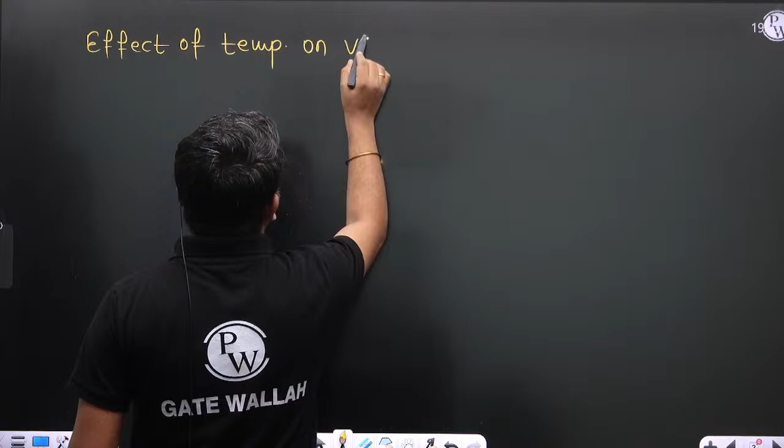So beta, whatever concept we discussed in the previous class, is that clear to everyone? In the last class, we discussed the effect of temperature on viscosity of fluid.

Okay, now see here, just one minute. So if I'm talking about liquids, as temperature increases, what happens to the liquid viscosity? As temperature increases, the liquid viscosity decreases.

Right? Good evening, Sahib. And why does it decrease? Because cohesive force decreases. As temperature increases, cohesive force decreases. We already discussed the factors responsible for the viscosity of the fluid.

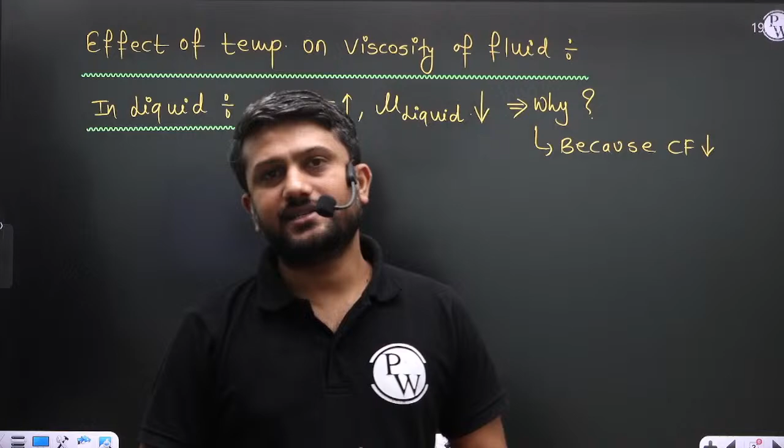The first factor is cohesive force, and the second factor is molecular momentum exchange. In liquids, cohesive force is predominant or significant as compared to molecular momentum exchange. And we know that as temperature increases, the intermolecular attraction force between molecules decreases, and that's why the viscosity of the liquid decreases as temperature increases.

Now if I'm talking about gases, what happens in case of gases? In gases, as temperature increases, the viscosity of gases increases. And why does it increase? Because molecular momentum exchange increases. In gases, molecular momentum exchange is significant over the cohesive force.

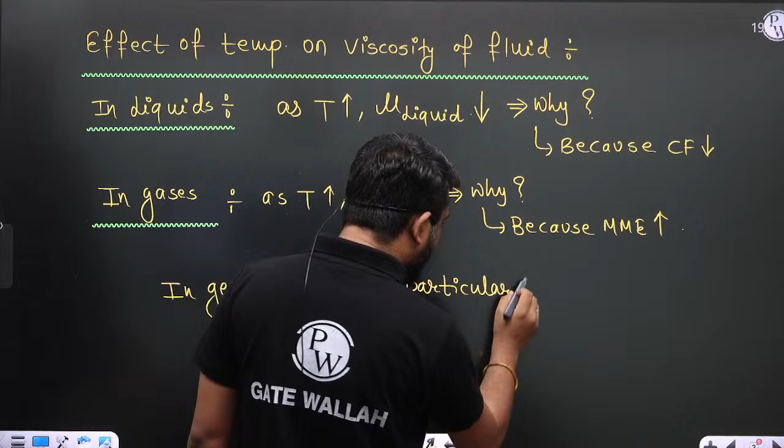Okay, and in general, at a particular temperature, which has more viscosity - liquid or gases? Tell me, at a particular temperature, which has more viscosity? Yes, absolutely. Liquid has more viscosity at a particular temperature as compared to gases.

Liquid has more viscosity as compared to gases at a particular temperature in general. Now see this graph. Just one minute, focus on this graph, beta. This is the graph between absolute viscosity versus temperature.

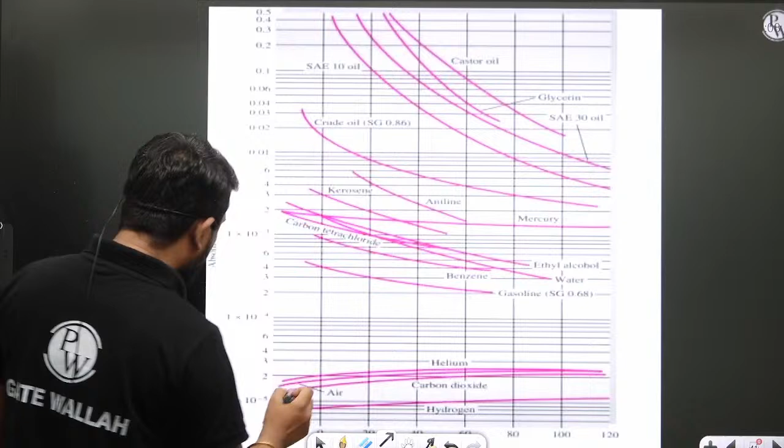In the y-axis there is viscosity, and in the x-axis there is temperature. Now see, if I'm talking about oils and liquids - castor oil, glycerine, SAE30 oil, crude oil, mercury, kerosene.

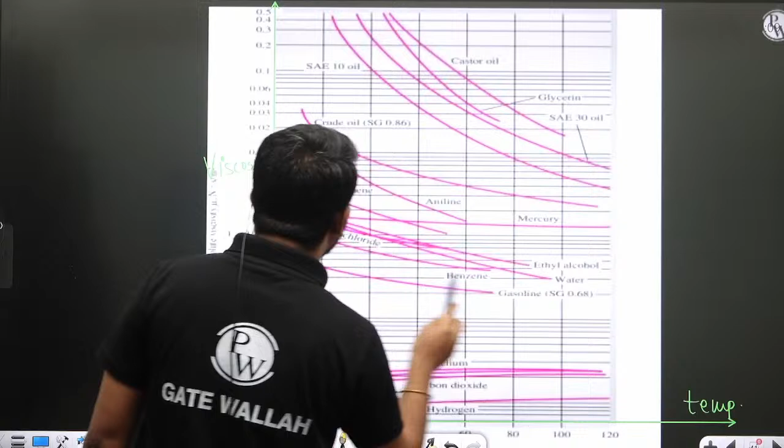So it's very much clear, as you increase the temperature, in case of liquid, viscosity decreases. From this graph we can easily comment that as temperature increases, liquid viscosity decreases. Now if I'm talking about gases, as the temperature increases, see here - in case of gases, these are the graphs. As temperature increases, the gas viscosity increases.

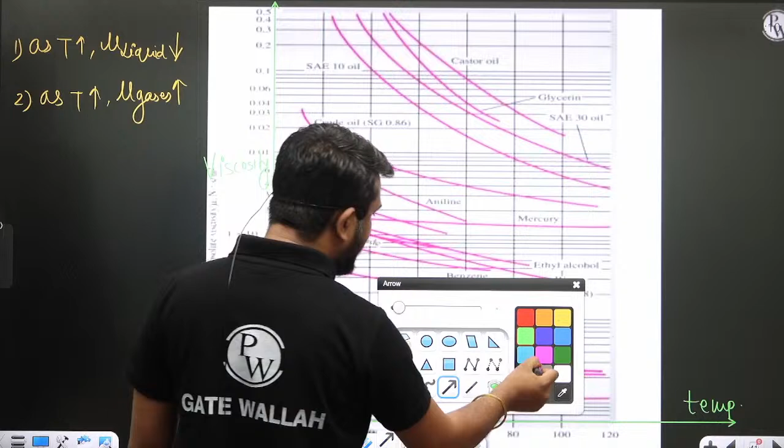And it's also very much clear at a particular temperature - let us consider this particular temperature, let's say 80 degrees Celsius. So beta, at a particular temperature, does liquid have more viscosity or do gases have more viscosity?

So let us assume in this graph that is 80 degrees Celsius. At a particular temperature, which has more viscosity - liquid or gases? Yes, absolutely correct, liquid has more viscosity at a particular temperature as compared to gases. I hope you can understand this conclusion.

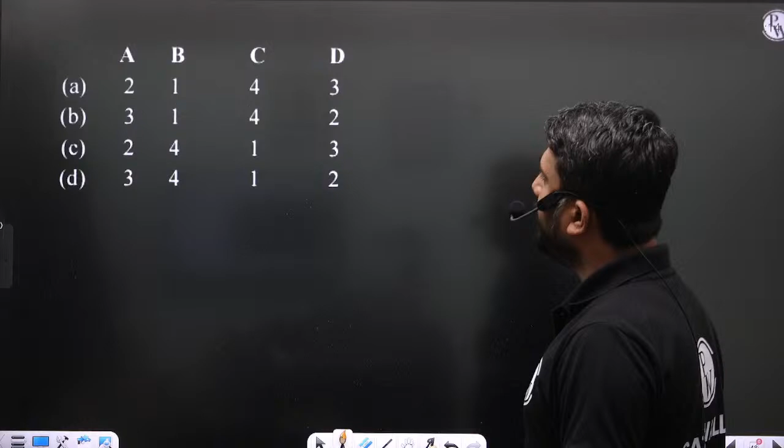So what is the correct match? A3, B1, C4, D2 - falling sphere is D2. So this is the correct matching: A3, B1, C4, D2. So A is wrong, C is wrong, D is wrong by themselves, but together A3, B1, C4, D2 is correct. So the correct answer is option B.

Fine. Now tell me, what is the effect of pressure on viscosity? The effect of pressure on viscosity of fluid is negligible. I hope you can understand this.

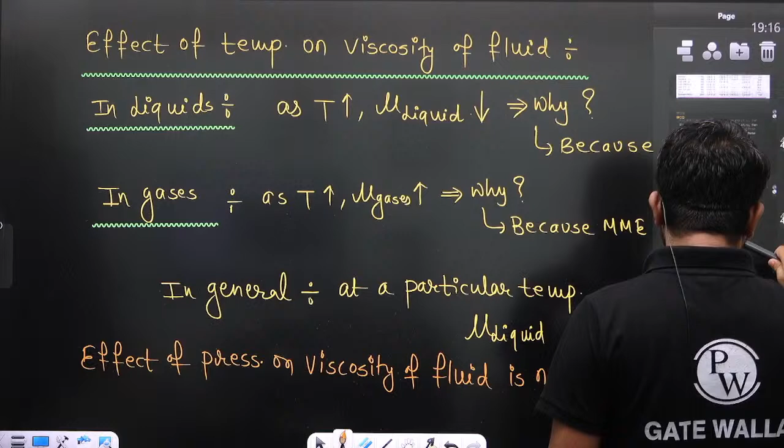Now come to the next fluid property, which is kinematic viscosity, also called momentum diffusivity. Can anyone tell me what kinematic viscosity is and why it is called momentum diffusivity? Kinematic viscosity is denoted by the Greek letter nu.

And what is kinematic viscosity? It is the ratio of dynamic viscosity to mass density, or simply density. So nu, which is the kinematic viscosity, is denoted by mu by rho - that mu by rho is nothing but the kinematic viscosity.

Now see here, we already have dynamic viscosity as a fluid property, so why is kinematic viscosity important? Why does kinematic viscosity come into the picture? Can anyone tell me why there is a need for kinematic viscosity?

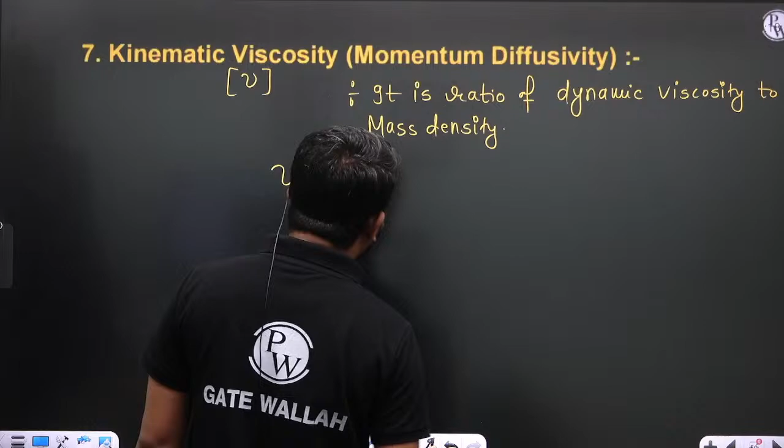How can we say two opposite properties, sir? See here, if I'm talking about dynamic viscosity, kinematic viscosity is dynamic viscosity by density. So what does dynamic viscosity represent? It represents the resistance in a flow.

This property represents resistance to flow. If dynamic viscosity is more, then definitely the resistance to flow is more. The second property, which is density, is nothing but the measure of inertia or measure of heaviness. Actually, beta, this helps to flow.

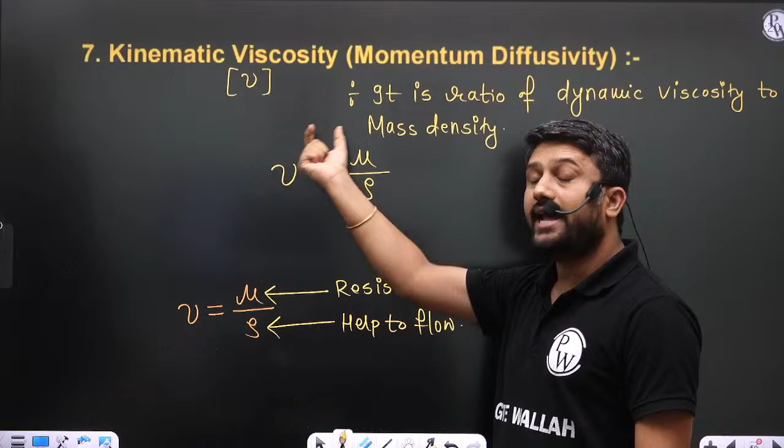Actually, this helps to flow. The numerator property of the fluid offers resistance to flow, whereas the density offers help to flow. So actually this kinematic viscosity is a ratio of two opposite properties. One property resists flow, and the other property helps flow. That's why this property comes into picture.

Because there is some property which is a ratio of two opposite nature properties, let us consider one layer. This is layer one of a fluid, and this is another layer. Let us consider the fluid particle present in this layer is flowing with a velocity of 10 meter per second.

This is layer number 1, and this is layer number 2. So layer number 1 particle is having velocity 10 meter per second. So momentum is transferred from layer 1 to layer 2.

Momentum transfer from layer 1 to layer 2 depends on mu and rho. I hope you can understand this. What will be the velocity of layer 2, or the particle present at layer 2? That depends on how much momentum is transferred by layer 1 to layer 2.

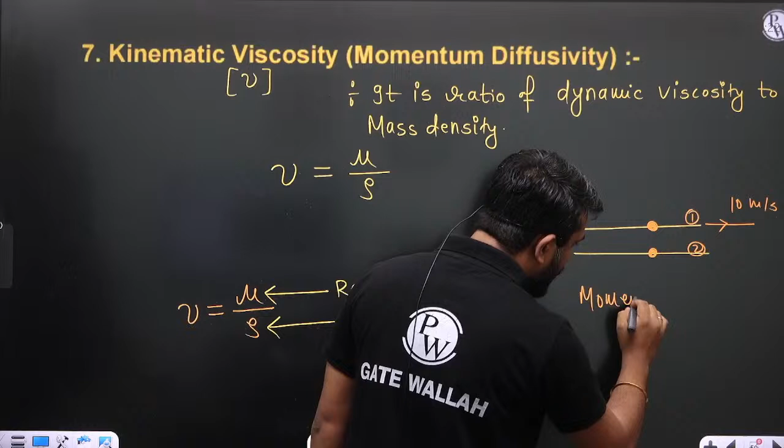This momentum transfer from layer 1 to layer 2 is directly proportional to bonding between the molecules, or we can say it is directly proportional to cohesive force. So we can say it is directly proportional to viscosity.

Whereas this momentum transfer from layer 1 to layer 2 is directly proportional to 1 upon density, or inversely proportional to density. If inertia is more, then momentum transfer will be less.

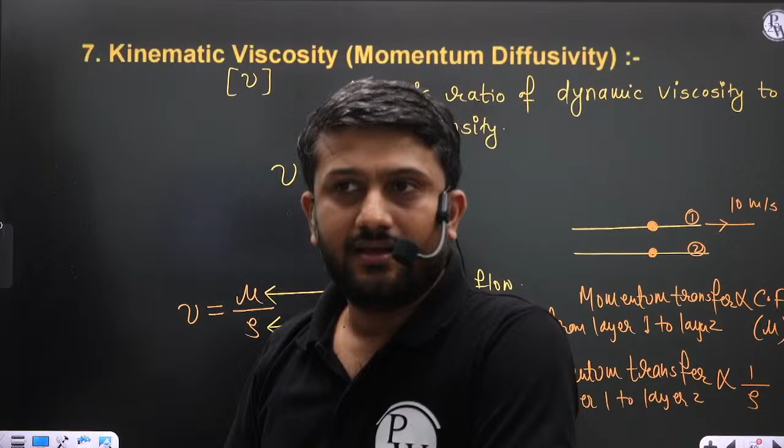Is it clear? So beta, can we say this momentum transfer, if you compile these two factors, then we can say that momentum transfer from layer 1 to layer 2 is directly proportional to mu by rho.

Is it fine? So we can define, this is the fluid property. The dynamic viscosity is a fluid property, this density is a fluid property, that means the ratio is also a fluid property.

And this ratio is called momentum diffusivity, because momentum transfer from layer 1 to layer 2 depends on these two. So that is called momentum diffusivity, and also we can say this is the kinematic viscosity. So beta, it is clear why kinematic viscosity comes into picture.

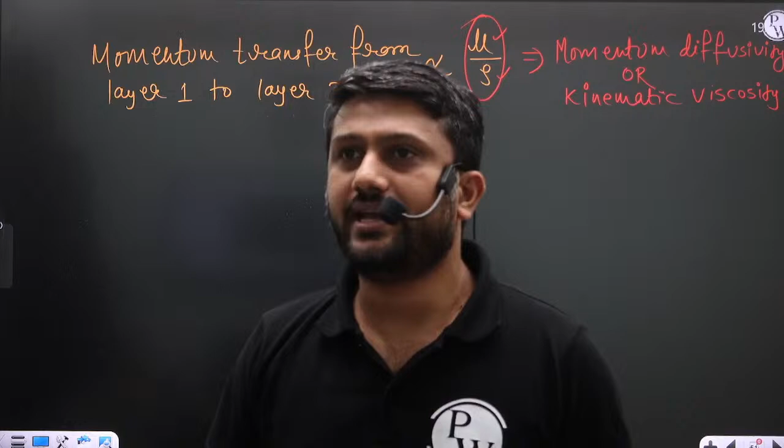Though we have the dynamic viscosity, why does kinematic viscosity come into picture? Actually, kinematic viscosity is a ratio of two properties which tells us about the momentum transfer, or momentum diffusion, from one layer to another. That's why dynamic viscosity alone is not sufficient to tell us how much momentum transfers from one layer to another. The dynamic viscosity does not tell us that. Are you getting my point?

Momentum transfer from layer 1 to layer 2 depends on the dynamic viscosity. It also depends on the density: directly proportional to the viscosity, inversely proportional to the density. That's why another property is required which tells us how much momentum transfers from layer 1 to layer 2, and that's why kinematic viscosity comes into picture.

Is it clear or not? Is it crystal clear? These things you won't find in any book, whatever I explained. But please try to understand these things. Is it clear? I want a reply from everyone, those students present here. Is it clear or not?

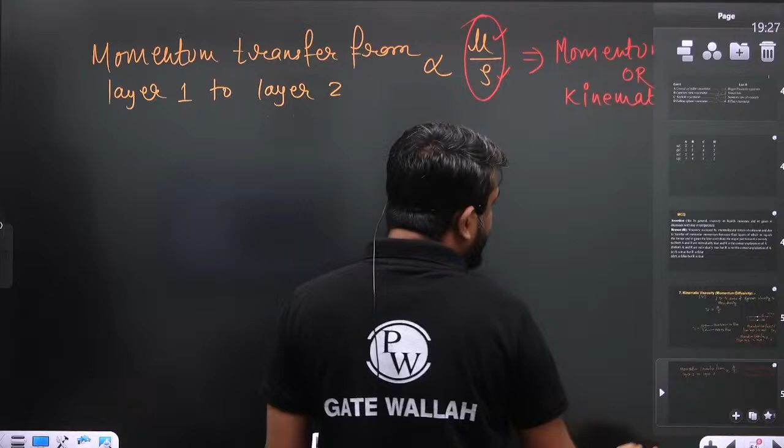Okay fine, now come to the unit part. What is a unit? Let's talk about the SI unit. Can anyone tell me what is the SI unit of kinematic viscosity?

What is the SI unit of the kinematic viscosity? Can anyone tell me? Okay, it's simple. See, kinematic viscosity is mu by rho. And what is the unit of mu?

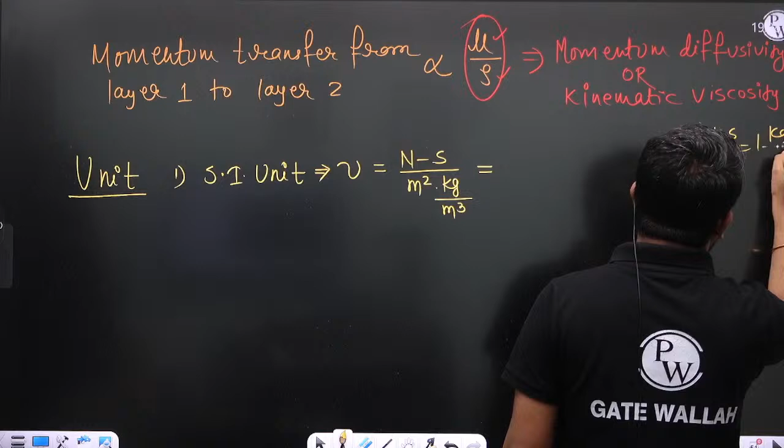The unit of mu is Newton second per meter square, and the unit of rho is kg per meter cube. Also we know that 1 Newton second per meter square is equal to 1 kg per meter second. So instead of Newton second per meter square, we can write kg per meter second into meter cube per kg. So kg cancels out, leaving meter into meter square.

So ultimately what you get is meter square per second. This is the SI unit of kinematic viscosity. Now, in the MKS system, the unit is the same, meter square per second. In the CGS system, the unit is centimeter square per second.

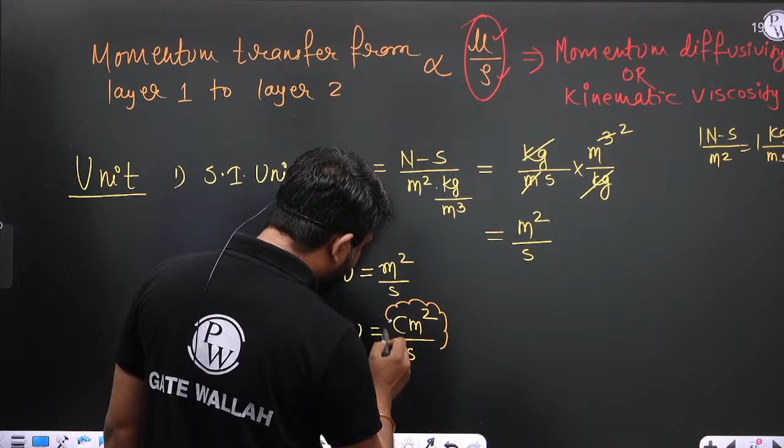And this centimeter square per second is called Stoke. So 1 Stoke is equal to 1 centimeter square per second.

Now, can you establish the relation between the SI unit and the CGS unit? So 1 Stoke is equal to 1 centimeter square per second, or we can say 10 to the power minus 4 meter square per second. So always remember, 1 Stoke is equal to 10 to the power minus 4 meter square per second. This is the relation between the CGS unit and the SI unit.

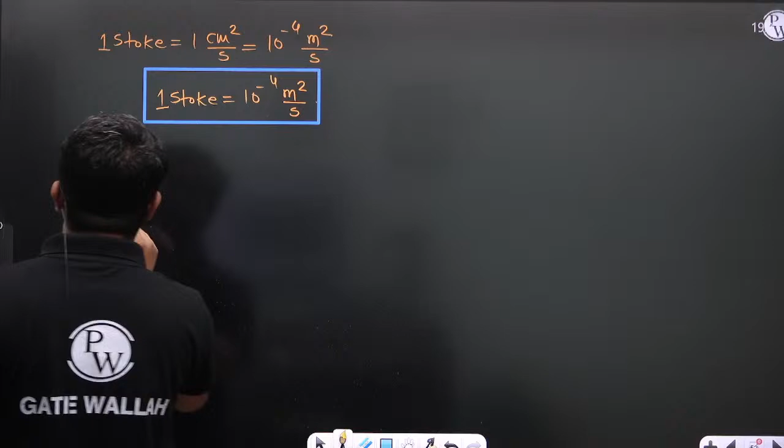Is it okay? Now see the effect of temperature on kinematic viscosity of fluid. Effect of temperature on kinematic viscosity of fluid. So what happens in case of gas, and what happens in case of liquids?

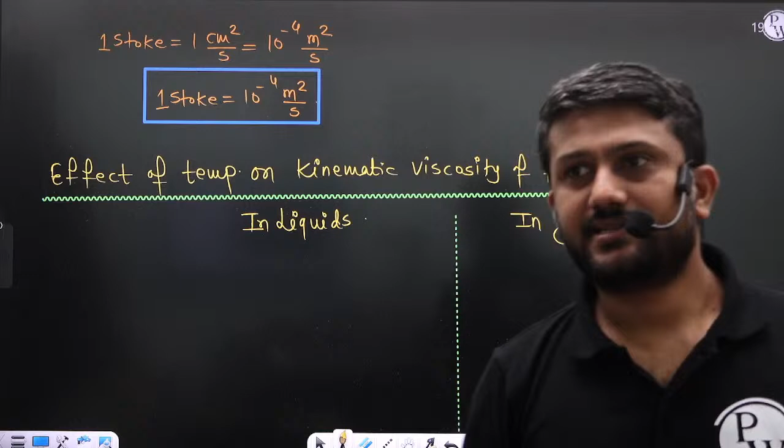In liquids, what happens as you increase the temperature? And in case of gas, what happens? When you increase the temperature, what happens in case of liquids, and what happens in case of gases? So, what happens in case of liquid? Can anyone tell me the answer, or think about it?

Okay, if I'm talking about liquids, we know kinematic viscosity is the ratio of dynamic viscosity to density. Now, as you increase the temperature...

As the temperature increases, what happens with dynamic viscosity and density? I'm talking about liquids now. We know that as the temperature increases, the dynamic viscosity of liquid decreases.

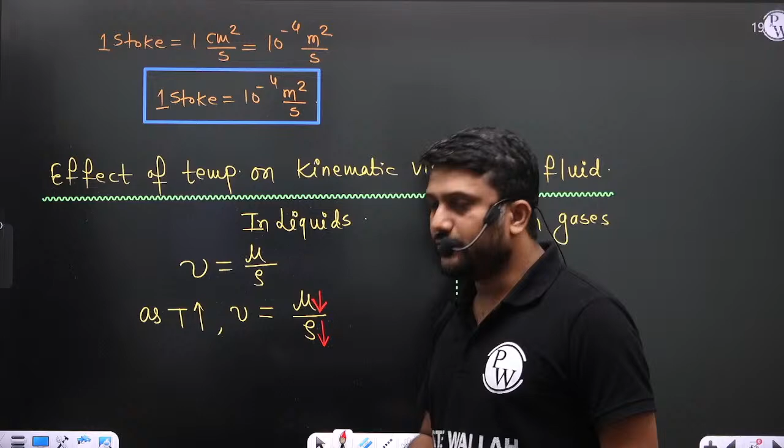Also, as the temperature increases, the density decreases. Please try to understand this: as the temperature increases, dynamic viscosity of liquid decreases, and density of liquid decreases. So if you see this expression, the numerator, dynamic viscosity, decreases, and the denominator also decreases.

But if you see this relation clearly, dynamic viscosity decreases more as compared to the decrease in density. If you increase the temperature, dynamic viscosity decreases more as compared to density. Sir, how can you say this? As temperature increases, dynamic viscosity decreases more as compared to decrease in density.

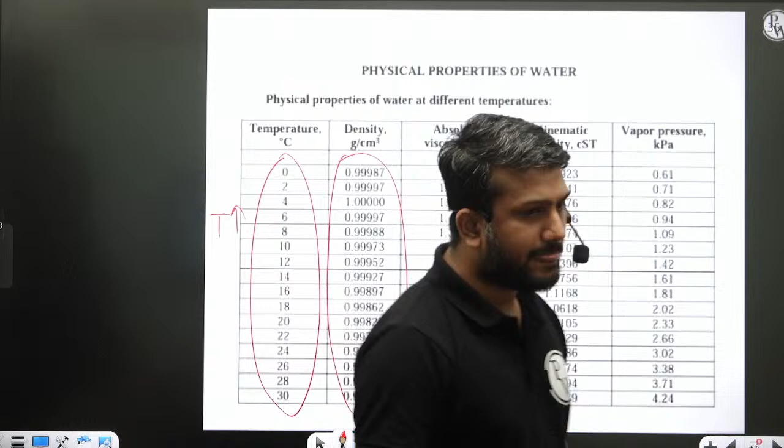So I will give you an example. Let us consider water. As the temperature increases, see here, definitely after 4 degrees Celsius, the density continuously decreases. So as the temperature increases, density decreases.

Now come to the viscosity part. Viscosity also decreases, but if you see this data, it is very much clear that viscosity decreases more. For a given amount of temperature change, it is clear that viscosity decreases more as compared to decrease in density.

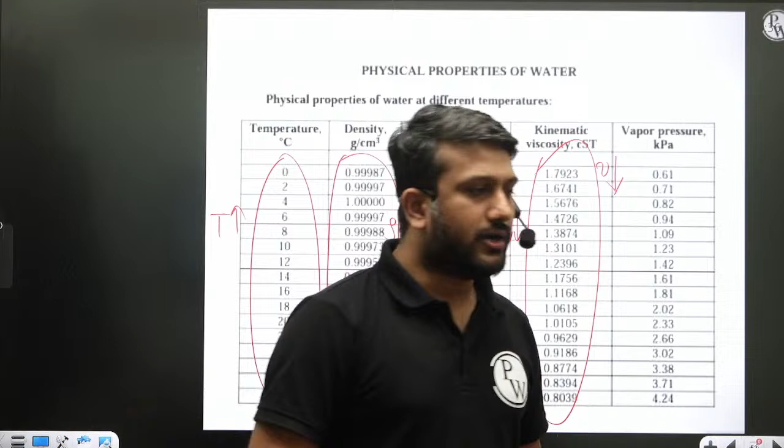Is it fine now? And if you see this kinematic viscosity table, it is very much clear that kinematic viscosity decreases. So as the temperature increases, kinematic viscosity decreases in case of liquid. In case of liquid, as the temperature increases, the numerator value decreases more as compared to the denominator value, and that is the reason liquid kinematic viscosity decreases.

Is it clear to everyone? Now come to the gases. What happens in case of gases? In case of gases, as the temperature increases, what happens with the dynamic viscosity of gases?

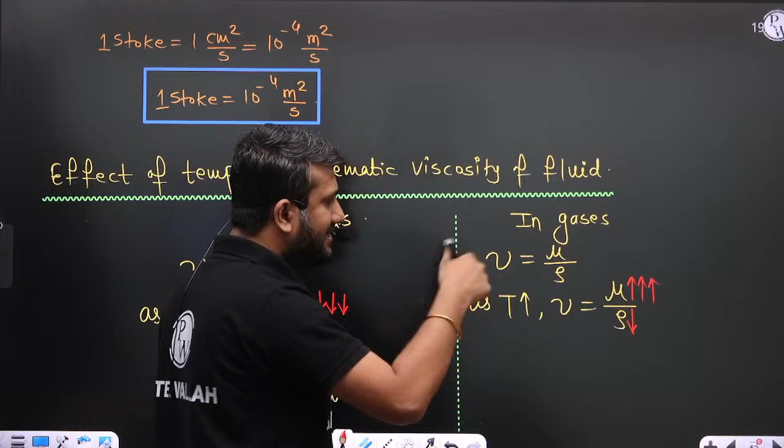As the temperature increases, the dynamic viscosity of gases increases. And what about the density? As the temperature increases, the density decreases. So it is very much clear, numerator increases, denominator decreases, so ultimately nu increases. So as the temperature increases, kinematic viscosity of gases increases.

As the temperature increases, liquid kinematic viscosity decreases. Is it clear or not? Tell me, is it clear to everyone?

No, why does gas also decrease? Sir, in gas it increases, because numerator increases and denominator decreases. So nu is directly proportional to mu, so mu increases, nu increases. Nu is inversely proportional to rho, so rho decreases, nu increases. So anyway, nu increases. So in case of gases, as temperature increases, the kinematic viscosity increases.

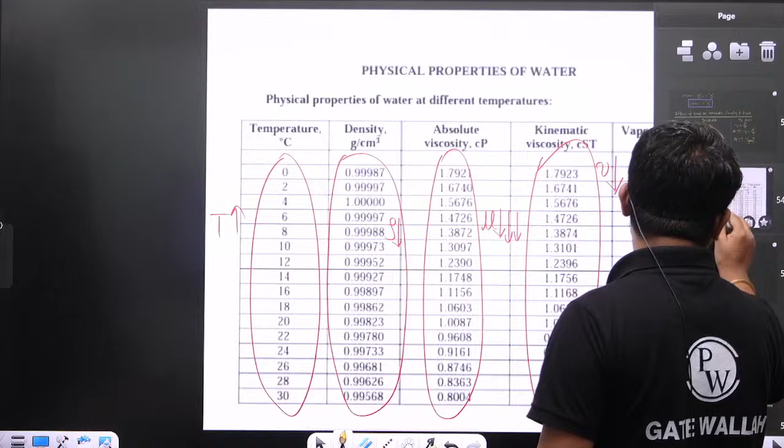Okay, now can anyone tell me, if you compare kinematic viscosity of liquid and kinematic viscosity of gases, which one is more? Is kinematic viscosity of liquid more compared to gases, or is kinematic viscosity of gases more compared to liquid, or are both possible? And whatever I am asking corresponds to a particular temperature.

What is your answer? At a particular temperature, tell me which one is correct. Option A, this is option B: the liquid kinematic viscosity is lesser than the gas kinematic viscosity. Option C, both are possible. Option D, none of these.

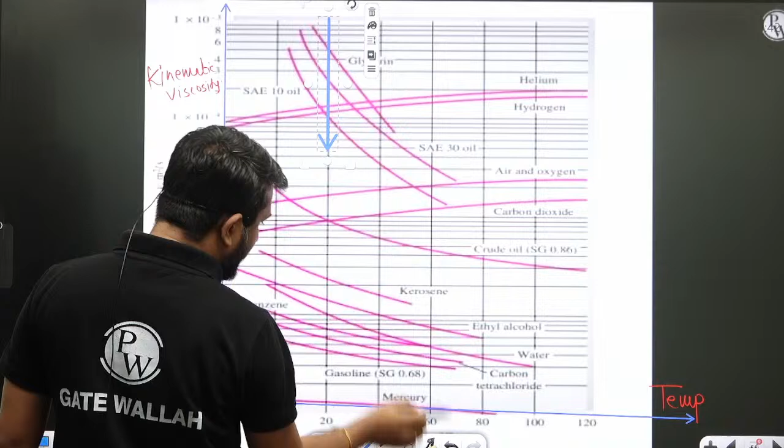Now, if I'm talking about a particular temperature, let us consider that is 20 degrees Celsius. Now, at 20 degrees Celsius, if you see here,

if I'm talking about air and oxygen, see here, this is the kinematic viscosity of air and oxygen, right?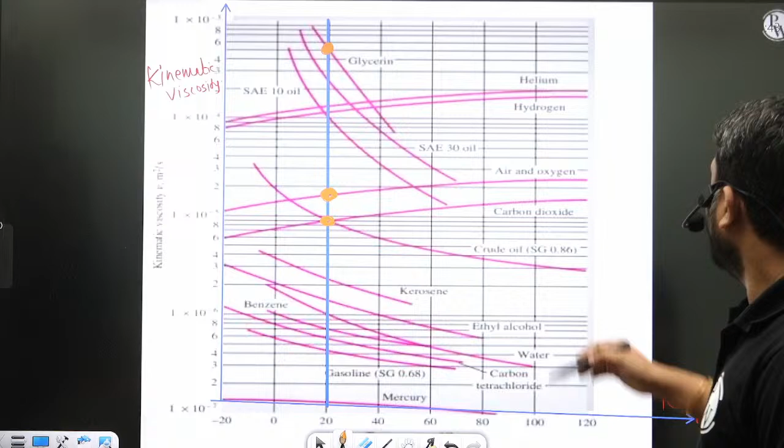Now, if I'm talking about crude oil, that is a liquid. So at 20 degrees Celsius, this is the kinematic viscosity of crude oil. At 20 degrees Celsius, kinematic viscosity of glycerin - glycerin is liquid, air and oxygen are obviously gaseous, and crude oil is again liquid.

So tell me, at a particular temperature, is liquid kinematic viscosity greater than the gas kinematic viscosity, or is liquid kinematic viscosity lesser than the gas kinematic viscosity? At a particular temperature, both are possible.

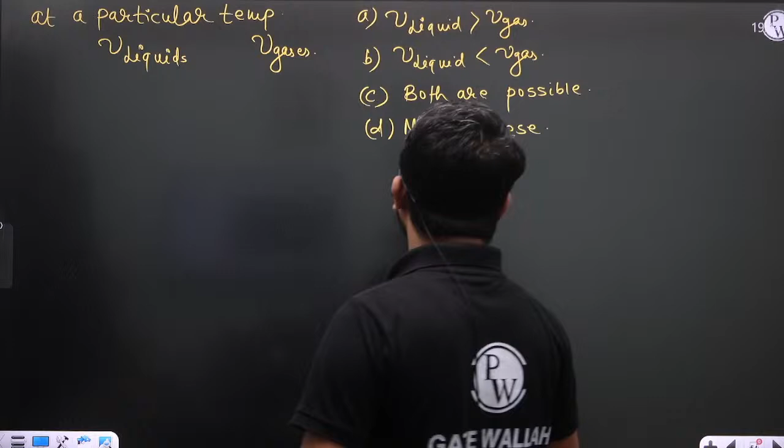We didn't specify which liquid, which gas. I'm simply asking, at a particular temperature, what is the relation between kinematic viscosity of liquid and kinematic viscosity of gases? Since I'm not specifying the liquid and gas, at a particular temperature both are possible - kinematic viscosity of liquid could be greater than that of gas, or it could be lesser.

Now, at a particular temperature, let's look at the kinematic viscosity of water and kinematic viscosity of air. What is the relation between kinematic viscosity of water and kinematic viscosity of air? Now see again this graph - kinematic viscosity variation with temperature.

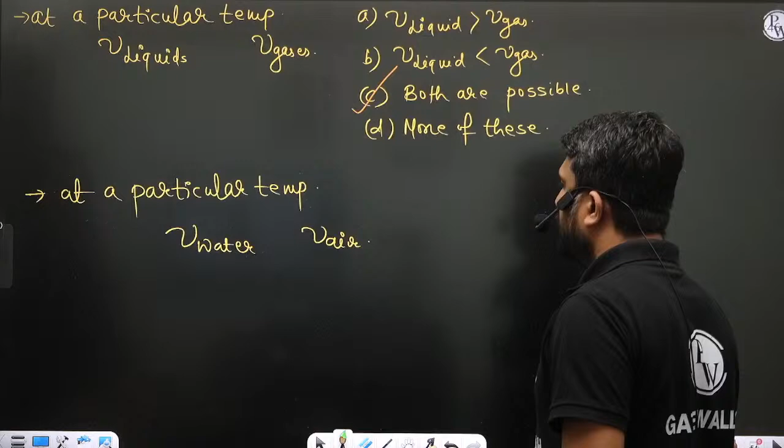This is the graph for water, and this is the graph for air. So at any temperature, not only at a particular temperature, but at any temperature, we can say that water's kinematic viscosity is lower than air's kinematic viscosity.

So whether you are comparing at a particular temperature or at any temperature, the kinematic viscosity graph of water is below the kinematic viscosity graph of air. So at any temperature, the kinematic viscosity of water is lower than the kinematic viscosity of air.

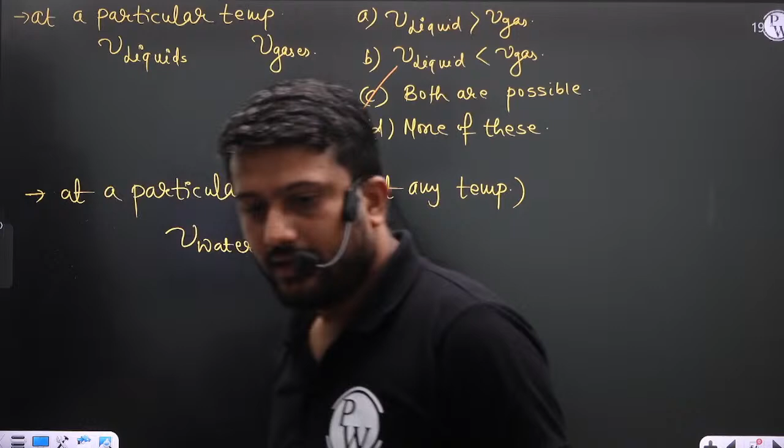Is it fine? So if someone asks you what is the relation between kinematic viscosity of liquid and kinematic viscosity of gas at a particular temperature, you can say kinematic viscosity of liquid could be more or less than kinematic viscosity of gas - both are possible. But if someone asks about kinematic viscosity of water versus air specifically, you can say kinematic viscosity of water is lower than kinematic viscosity of air. Is it fine? Shall we proceed?

Okay, now come to the very important relation between kinematic viscosity and temperature for ideal gases - for gases that are assumed as ideal gases.

See here, relation between kinematic viscosity and temperature. Relation between kinematic viscosity and temperature for the gases, and gases are assumed as ideal gases.

Now see here, nu is equal to mu by rho. So if I'm talking about the dependency of mu with temperature, what is the dependency of mu with temperature in case of ideal gases? What is the relation between mu and temperature if I'm talking about ideal gases? What is that relation?

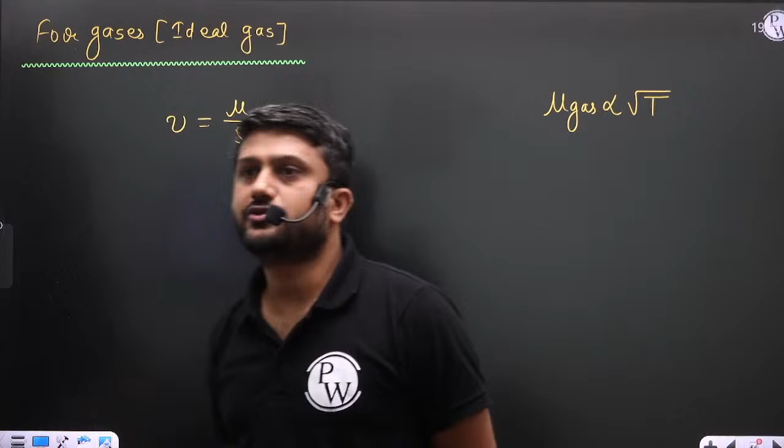Beta, we already discussed this, na? We already discussed in case of gases, the dynamic viscosity is directly proportional to root over T. We discussed this part in the previous class. Remember the Sutherland equation? Remember the Sutherland law? Remember the kinetic theory of gases? So we can say that dynamic viscosity of gases is directly proportional to root over T.

What about the density? What about the density? So if you use the ideal gas equation, we know that PV is equal to MRT, or simply P is equal to M by V RT. And what is M by V? That is rho. So simply we can say rho is equal to P upon RT.

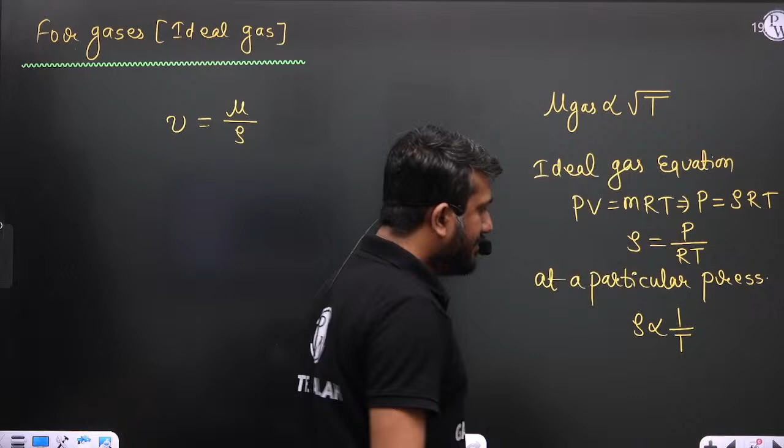Now, at a particular temperature and pressure, R is a characteristic gas constant. So at a particular pressure, we can write density is directly proportional to 1 by temperature. Density is directly proportional to 1 by temperature, at a particular pressure.

Now see here, we know the relation of mu and T, and we know the relation between rho and T. So from here, we can say kinematic viscosity of gases is directly proportional to root over T upon 1 by T. And from here we can say the kinematic viscosity of gases is directly proportional to T to the power 1 by 2 plus 1, that means T to the power 3 by 2.

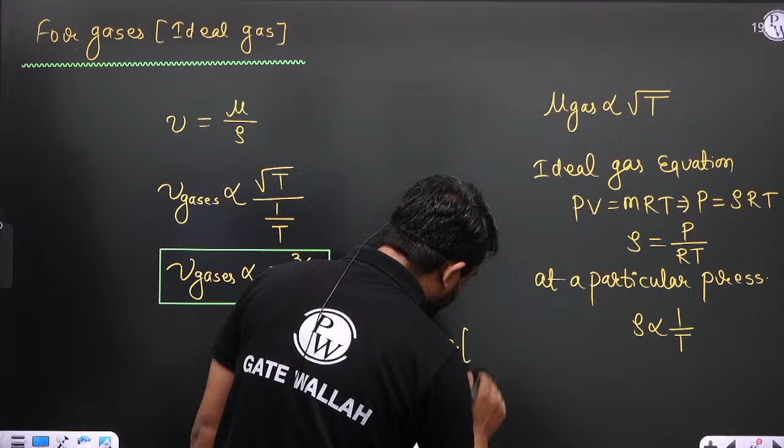So this is a very important relation. The kinematic viscosity of ideal gases is directly proportional to T to the power 3 by 2, where T is the absolute temperature, in Kelvin scale. T is nothing but the absolute temperature.

So if we know the kinematic viscosity of gas corresponding to a particular temperature T1, then we can easily comment on the kinematic viscosity of gas at a corresponding temperature T2. Because we can write nu1 by nu2 is equal to T1 by T2 to the power 3 by 2.

Okay, is it clear or not? Tell me. So if it is clear, then can we solve this MCQ problem?

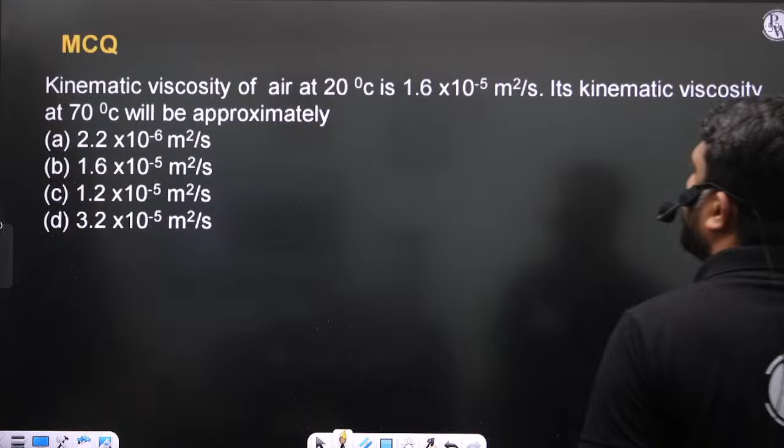In the question, it is mentioned that the kinematic viscosity of air at 20 degrees Celsius is 1.6 into 10 to the power minus 5 meter square per second. Its kinematic viscosity at 70 degrees Celsius will be approximately. So temperature increases: in case 1, the temperature is 20 degrees Celsius; in case 2, temperature increases to 70 degrees Celsius. So 20 degrees Celsius means 293 Kelvin, and 70 degrees Celsius means 343 Kelvin.

So temperature increases, and we know that as temperature increases, the kinematic viscosity of gases increases. Now see, if you check the options, option B says it remains the same, 1.6 into 10 to the power minus 5. Option B says if you increase the temperature, kinematic viscosity remains the same. So this is wrong.

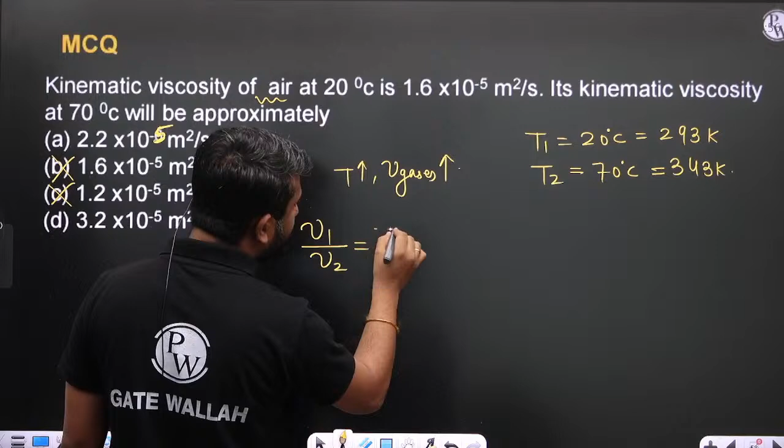So we know that relation. We can write directly nu1 by nu2 is equal to T1 by T2 to the power 3 by 2. So nu1 is 1.6 into 10 to the power minus 5 upon nu2, where T1 is the absolute temperature.

T1 is 20 degrees Celsius. Convert it into Kelvin scale, so 293. So 293 divided by 343, this is 343 to the power 3 by 2. So calculate.

Calculate kinematic viscosity corresponding to 70 degrees Celsius. So what is the correct answer? Right, 2.2 into 10 to the power minus 5 meter square per second. So this is the answer.

Okay, now come to the next question. The next question is an MSQ question.

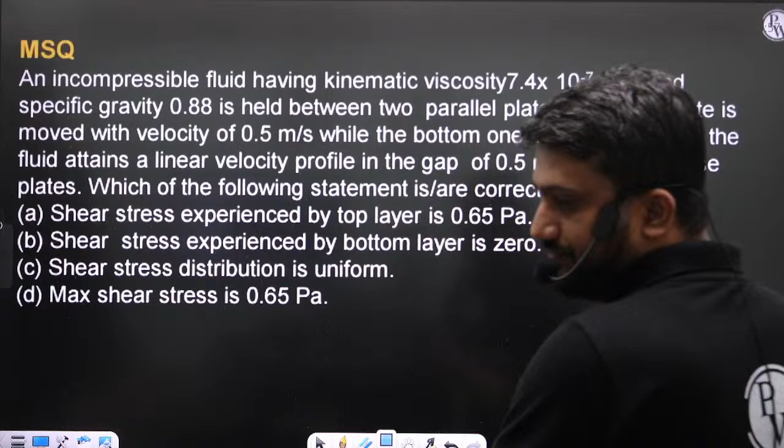No, Saturday you have class.

Now see the next question. An incompressible fluid having kinematic viscosity 7.4 into 10 to the power minus 7 meter square per second and specific gravity 0.88 is held between two parallel plates. If the top plate is moved with a velocity of 0.5 meter per second, while the bottom one is held stationary, the fluid attains a linear velocity profile in the gap of 0.5 millimeter between these plates. Which of the following statement is correct?

Option A says shear stress experienced by the top layer is 0.65 Pascal. Option B says shear stress experienced by the bottom layer is 0. Option C says shear stress distribution is uniform. And option D says maximum shear stress is 0.65 Pascal.

So basically in this question there are two plates, plate number 1 and plate number 2. The bottom plate is fixed, and the top plate is moving with some velocity, which is mentioned in the problem, equal to 0.5 meter per second.

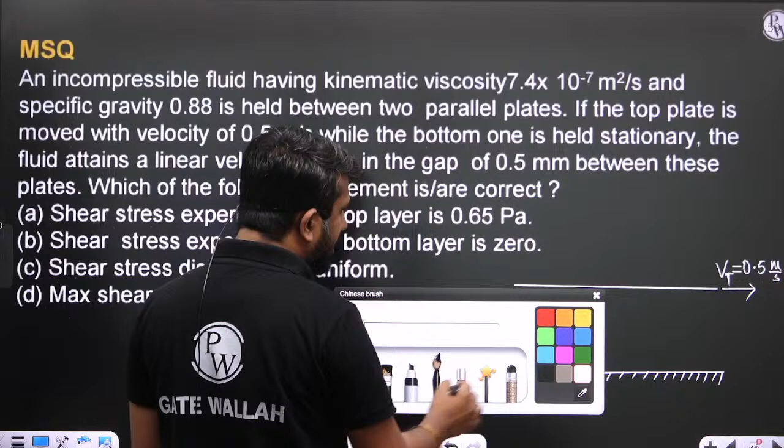In between these two plates, there is a fluid having a specific gravity of 0.88. Also, the gap between these two plates is mentioned, and that gap is 0.5 mm.

Also, the velocity profile for the fluid is mentioned, and that is a linear velocity profile. So this is the velocity profile.

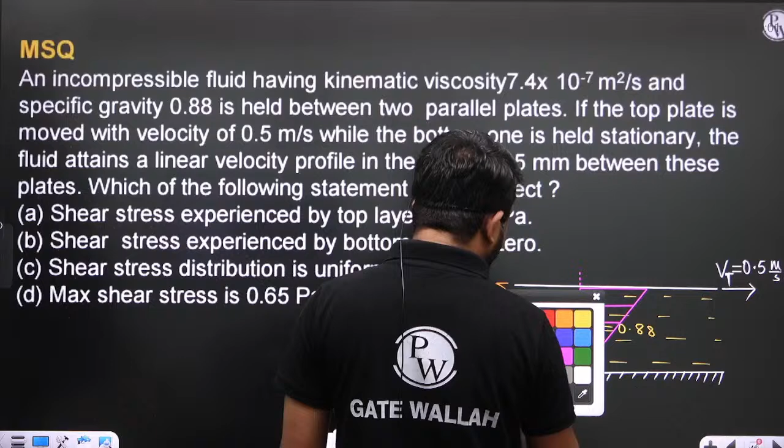Also in this problem, kinematic viscosity is mentioned, nu, and that is 7.4 into 10 to the power minus 7 meter square per second.

Now see, in this question, shear stress is asked. So to find out the shear stress, we have Newton's law of viscosity. To calculate the shear stress in a layer, we use that Newton's law of viscosity.

From Newton's law of viscosity we can write: shear stress experienced by any layer is equal to mu du by dy at that layer. This is your x-axis and this is your y-axis. So shear stress experienced by any fluid layer is equal to mu du by dy.

So first calculate mu, because kinematic viscosity is mentioned now. We know that nu is equal to mu by rho, or simply we can say mu is equal to nu into rho.

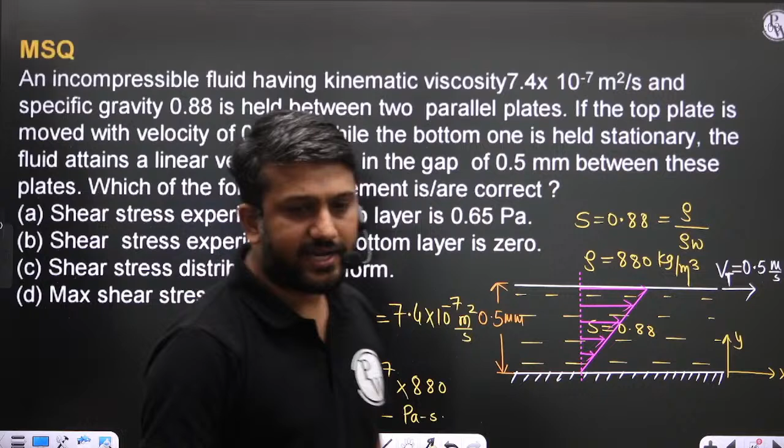So we can write mu, which is the dynamic viscosity, equal to 7.4 into 10 to the power minus 7 multiplied by 880, and this comes in Pascal second. So can anyone tell me what is the dynamic viscosity? 7.4 into 880 equals 6512, so that is 6512 into 10 to the power minus 7 Pascal second. This is the dynamic viscosity.

Now see here, beta. In this problem it is clearly mentioned that the velocity profile is linear. If this is the bottom plate and this is the top plate moving with a velocity of Vt, it is clearly mentioned that the velocity profile is linear. This is the velocity profile.

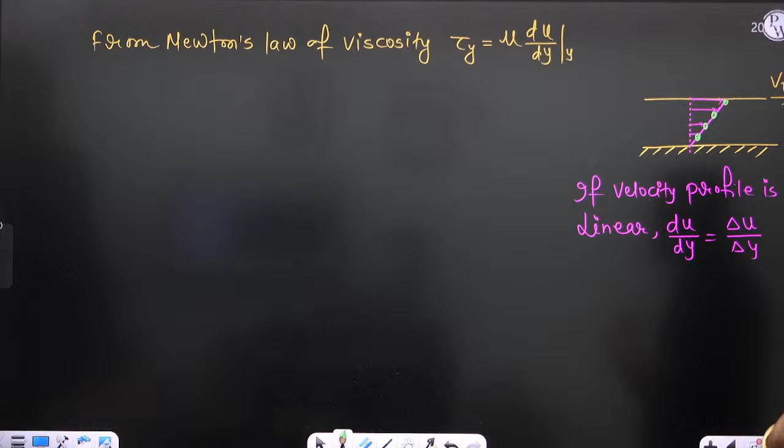So if velocity profile is linear, then simply we can write du by dy is equal to delta u by delta y. If you calculate the slope here, the slope is same. So if velocity profile is linear, then directly we can write du by dy is equal to delta u by delta y. Or we can say this is also equal to the top plate velocity minus bottom plate velocity divided by the gap between these two plates. This we can write in case of the linear velocity profile only.

Is it clear now? So directly we can write that tau at any y is equal to mu into, since velocity profile is linear, u top minus u bottom divided by the gap between these two plates. Now see here, the shear stress experienced by any layer, because in this case du by dy is constant.

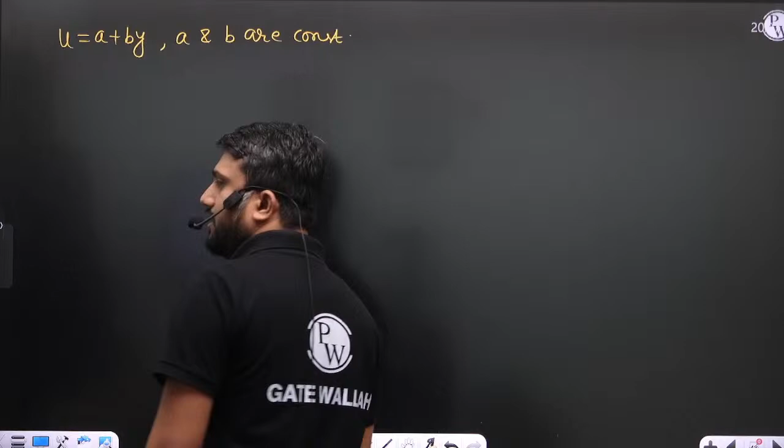If in this question it is clearly mentioned the velocity profile varies linearly, let us consider the velocity profile as u equals a plus by, where a and b are constant. This is the linear variation. So if you calculate du by dy, then it becomes b. That means du by dy is not a function of y in case of the linear velocity profile.

Now see here, if you see this Newton's law of viscosity, mu is not a function of y. Mu is constant, each layer having the same viscosity. So mu is independent of y, and du by dy is independent of y for the linear velocity profile. That means each layer experiences the same shear stress. Are you getting my point?

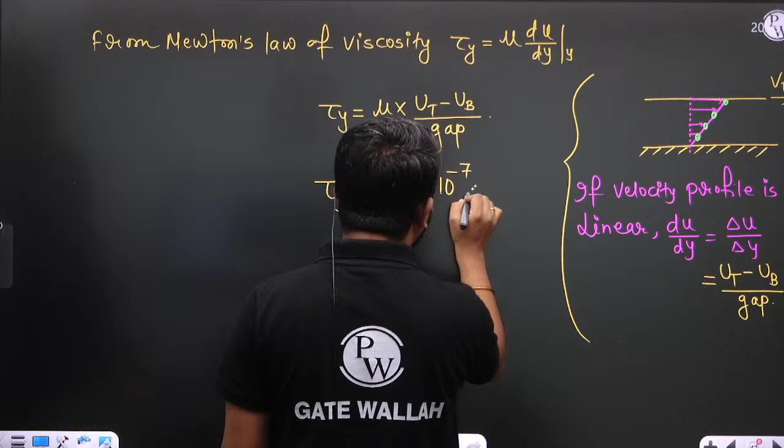And how do you calculate the shear stress? You can easily calculate it from here. In case of linear velocity profile, directly we can write this. Mu we already calculated as 6512 into 10 to the power minus 7, into the top plate velocity which is 0.5, minus the bottom plate velocity which is 0, divided by the gap which is 0.5 mm, that is 0.5 into 10 to the power minus 3 meter. So tau at any y comes to 0.6512 Pascal. This is the shear stress.

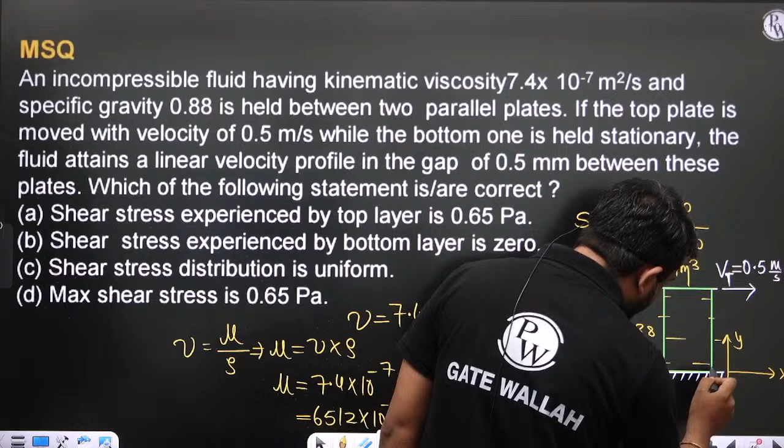So beta, each layer experiences the same shear stress. Is it clear to everyone? If you draw the shear stress variation, this is the shear stress variation, and this is the velocity variation. So each layer experiences the same shear stress, right?

Now come to statement C. Shear stress distribution is uniform. Is it correct or not? Shear stress distribution is uniform, correct or not? Yes, your shear stress distribution is uniform. So C is correct. Shear stress distribution is uniform, C is correct. Now come to statement D.

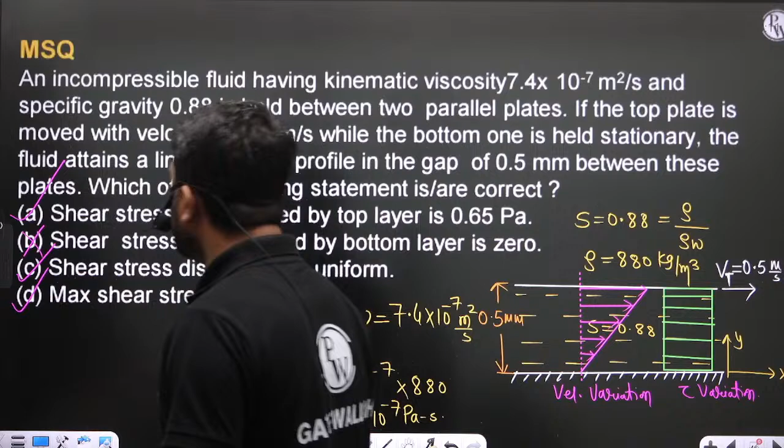Statement D says maximum shear stress is 0.65 Pascal. Yes, maximum shear stress is also 0.65 Pascal. So what is the correct answer for this question? The correct answer for this question is A. A is correct, C is correct, and D is correct.

Is it clear to everyone? Is this question clear or not? Beta, uniform na? Shear stress distribution is uniform na? Is this linear or uniform? Tell me, is this linear or uniform? Beta, uniform na?

Okay, so is it clear to everyone? Is it clear to everyone? So shall we move to the next part? Shall we move to the next part? Now come to the next part.

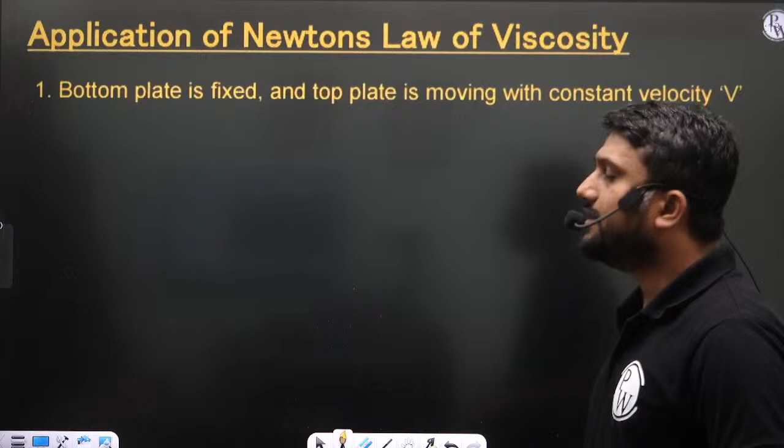So the next part is application of Newton's law of viscosity. We discussed Newton's law of viscosity in a very detailed manner. Now come to the application of Newton's law of viscosity. So the first application: bottom plate is fixed and the top plate is moving with constant velocity, that is V. We already discussed this case in the previous question only.

Right, the bottom plate is fixed. So let us consider, this is the top plate and this is the bottom plate. So in this case, we assume the bottom plate is fixed, whereas the top plate is moving with a certain constant velocity, that constant velocity is V. So let us consider that is Vt, Vt is equal to V. The top plate is moving with constant velocity, that is V.

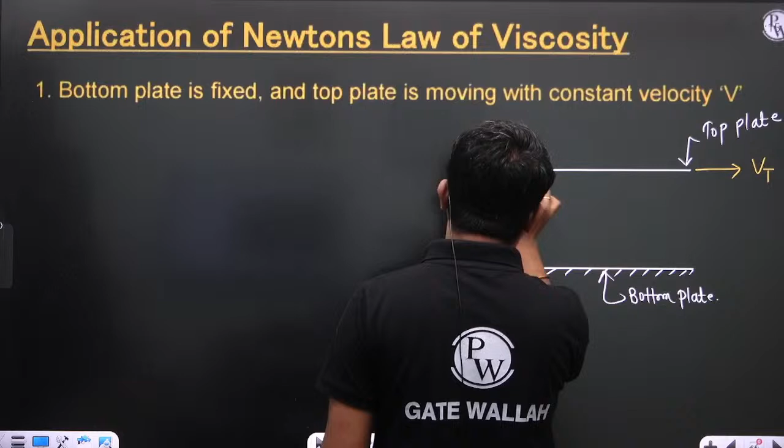And in between these two plates there is a fluid, right? And here what we assume in the fluid is that the velocity profile is linear. So beta, this is our assumption. Please try to understand this: velocity profile is linear. Maybe in future you will get cases where velocity profile is non-linear, but here what I'm assuming is velocity profile is linear.

So the fluid layer attains a linear velocity profile. This is the velocity profile. U is a function of y, and U linearly varies with y.

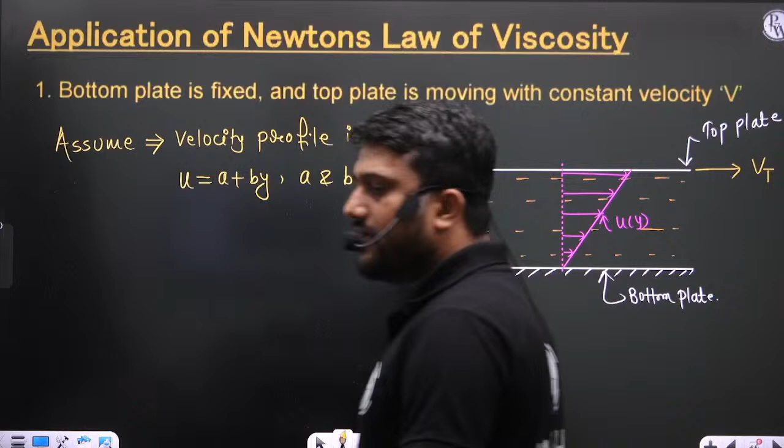To find the value of a and b, there is a need of boundary conditions, right? To calculate the value of a and b, there is a need of boundary condition. So let us just take 1 minute now.

Let us consider this gap is h. This is the x direction and this is the y direction. So to calculate a and b, there is a need of boundary condition. So can anyone tell me what is the boundary condition? What are the boundary conditions? Obviously, two boundary conditions are required.

Two boundary conditions are required. There are two constants, so two boundary conditions are required. So can anyone tell me what are the boundary conditions? So beta, it is simple now. Boundary conditions, if I'm talking about the boundary conditions,

at y is equal to 0, u is equal to 0, no slip condition. At y is equal to 0, u is equal to 0 because the bottom plate is stationary. And also we can write at y is equal to h, u is equal to Vt. Right? These are the no slip conditions. One no slip condition at y is equal to 0, another no slip condition at y is equal to h.

So we can write in this way. Now we have two boundary conditions. Now find out the value of a and b. So if we use the first boundary condition, at y is equal to 0, u is equal to 0. So from first boundary condition,

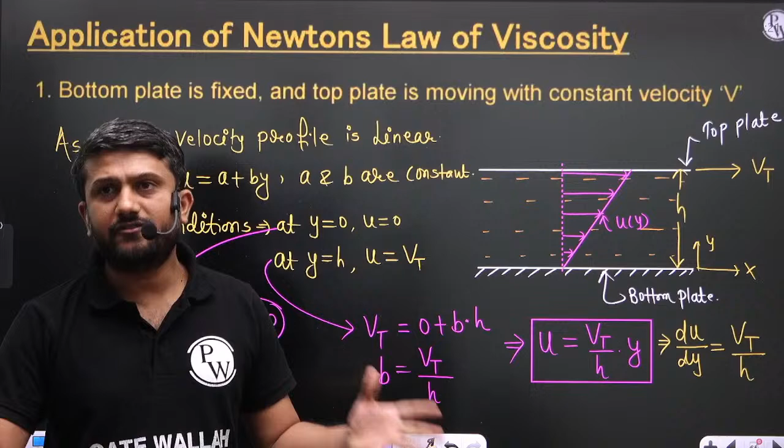That means beta, your du by dy is not a function of y, because the velocity profile is linear. So we can directly write du by dy is equal to, so tau at any y is equal to mu into Vt by h.

So this is the shear stress experienced by any layer, and it is also very much clear in this expression there is no y. That means shear stress is not a function of y. That means each layer experiences the same shear stress.

So if you draw the shear stress variation, this is the shear stress variation. The shear stress variation is uniform. This is the velocity variation, and this is the shear stress variation, the tau variation.

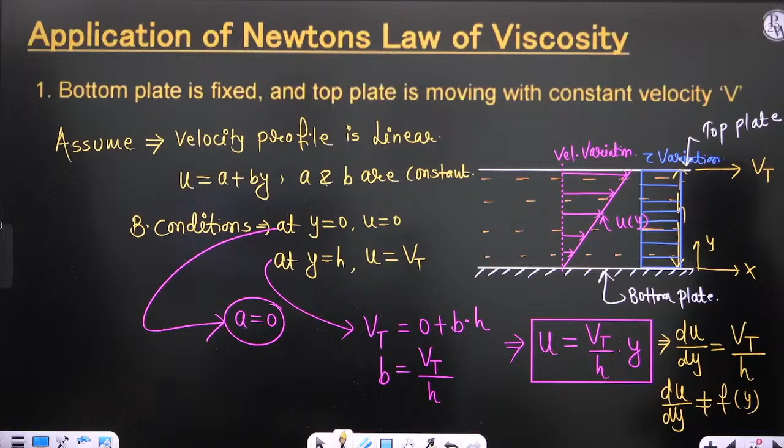Is it clear? If you want to generalize this expression for the linear velocity profile, in future you may get a problem in which the bottom plate is not fixed but is also moving with some velocity. So if you want to generalize this expression, we can write it in this way.

This is very simple. For linear velocity profile, there is no need to calculate the value of A, there is no need to calculate the value of B, if the velocity profile is linear.

If the velocity profile is non-linear, let us consider u is equal to a plus by plus cy square, a parabolic, second degree velocity profile. In that case, there is definitely a need to calculate a, b and c. But when the velocity profile is linear, there is no need to calculate a and b.

You can directly write, for linear velocity profile, du by dy is equal to delta u by delta y, or simply top velocity minus bottom velocity divided by gap. So the shear stress tau at any y is equal to mu into top velocity minus bottom velocity divided by gap. In general, we can write it this way.

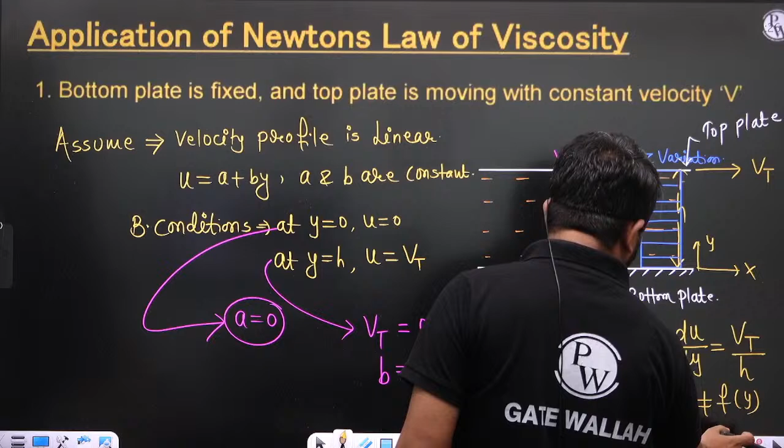At y equal to 0, if I ask you in general, even in interviews, what is the shear stress, most students say at y equal to 0 the shear stress is 0. But at y equal to 0, the shear stress is not 0. Even at y equal to 0, the shear stress is maximum at the surface. At the surface, the shear stress is maximum.

There is one reason for this confusion. At y equal to 0, u is equal to 0, because the bottom plate is stationary. So at y equal to 0, u is equal to 0, and so we think that du by dy is equal to 0.

But actually this du by dy, this du in this expression, please try to understand this point. This du is the relative velocity, but it is not the relative velocity between the plate and the fluid layer.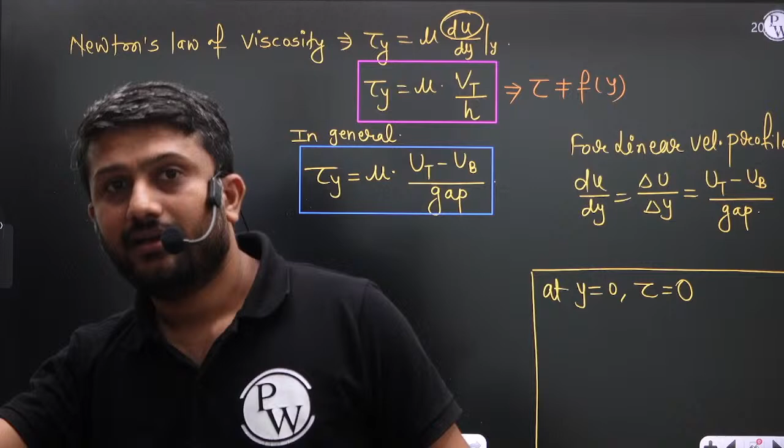Most students think this du is the relative velocity between the plate and the fluid layer, but actually this is the relative velocity between the fluid layers, not between the plate and the fluid layer. Are you understanding my point? Are you getting this point or not?

Are you understanding this point or not? Most students think, sir, at y equal to 0, the fluid layer velocity is equal to the plate velocity. That's fine, that's correct, there is no problem with this. At y equal to 0, the fluid layer velocity is equal to plate velocity, there is no problem with this, or we can say at y equal to 0 there is no relative velocity between the plate and the fluid layer.

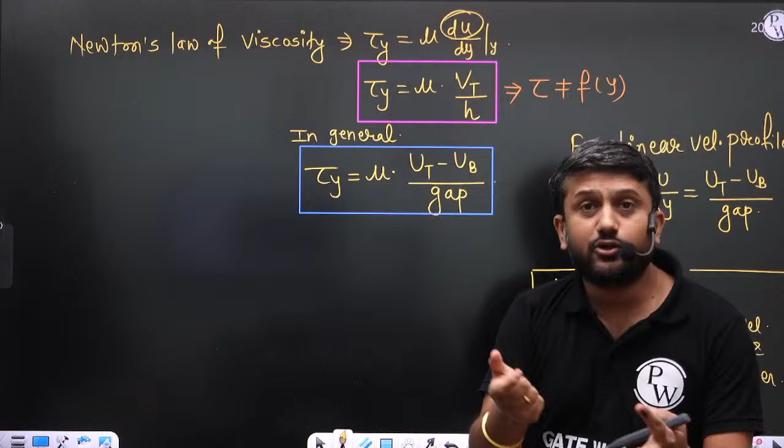When you see Newton's law of viscosity, that du by dy term, that is the relative velocity between the fluid layers which are dy distance apart. Please try to understand this point, this is a very basic point, most students get confused here. Beta, if you write this, this is Newton's law of viscosity for the fluid layers. So the du by dy, the du is the relative velocity between the fluid layers which are dy distance apart.

So at the plate, at y is equal to 0, this du by dy is maximum. This is the linear case. In this linear case, every layer has the same du by dy because this is a linear velocity profile. That's why at each layer you are getting the same shear stress.

But if the profile is non-linear, if u is equal to a plus by plus cy square like this, then at y is equal to 0, the du by dy is maximum, and that's why at y is equal to 0 you are getting maximum shear stress. So whatever the concept, theoretically and experimentally, obviously at the surface the shear stress is maximum. There is no doubt on this.

Is it clear or not? Tell me guys, this is a very fundamental thing. Is it clear or not? So don't make mistake in future, okay.

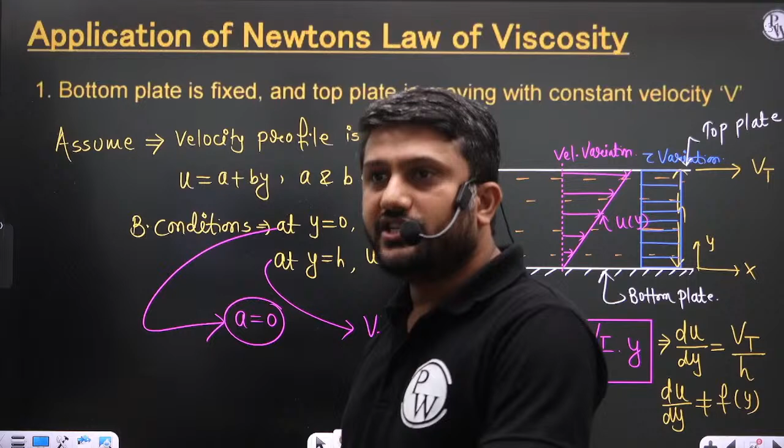Okay, now what is the power required? See, this plate is moving with some constant velocity. But we know that shear stress acts on this plate, and because of that shear stress, it tries to reduce the velocity. Getting my point?

So what is the power required? What is the power required for the top plate to maintain constant velocity, or simply we can say, what is the power required to overcome the friction?

So what is the power required to overcome the friction? Simply, this is the shear force experienced by the top plate, that is the shear force experienced by the top plate multiplied by the velocity of the top plate. So from here, you are getting the power required to overcome the friction.

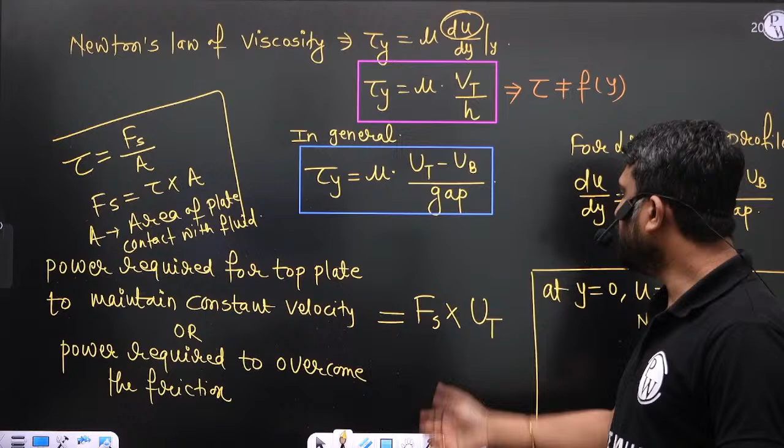And what is the shear stress at the top plate? Simply, tau is equal to Fs by A. So Fs is equal to tau multiplied by A, where A is the area of the plate which is in contact with the fluid. So from here you can easily find out the power required to overcome the friction.

Is it clear or not? And the shear stress distribution is uniform in this case. This is also a very important point. If the velocity profile is linear, then shear stress is not a function of y, that means the shear stress distribution with y is uniform.

Fine, now see, now come to the subcase of case number 1.

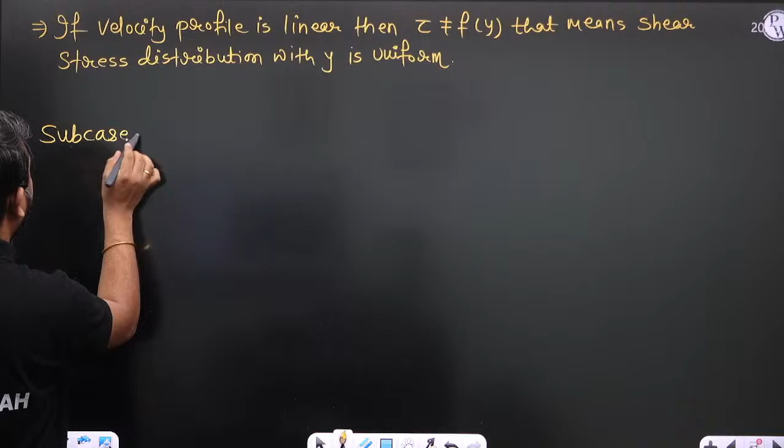Right, subcase of case number 1. Number of subcases are possible, beta. Let us consider.

See, this is the top plate, this is the bottom plate. Top plate is moving with velocity Ut, or you can say Ut. Let us consider that is Ut. And bottom plate is moving with velocity Ub, but in the opposite direction. In between there is a fluid.

Let us consider that Ut is greater than Ub. This is the top plate, moving with a velocity of Ut in the positive x direction, and bottom plate is moving with a velocity of Ub in the negative x direction. What I am assuming here is Ut is greater than Ub.

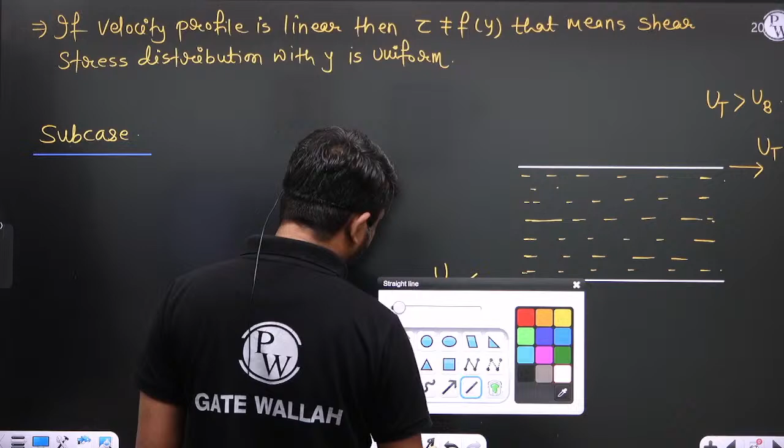Now again I am assuming here also the velocity profile is linear. So in most problems, if velocity profile is not mentioned, assume that velocity profile is linear. This is the only way to solve the problem. If velocity profile is mentioned, then take that velocity profile. But if velocity profile is not mentioned in a problem, then assume it is linear.

Okay, now see, this is the velocity profile. And also I am assuming this gap between the top plate and the bottom plate, that is h.

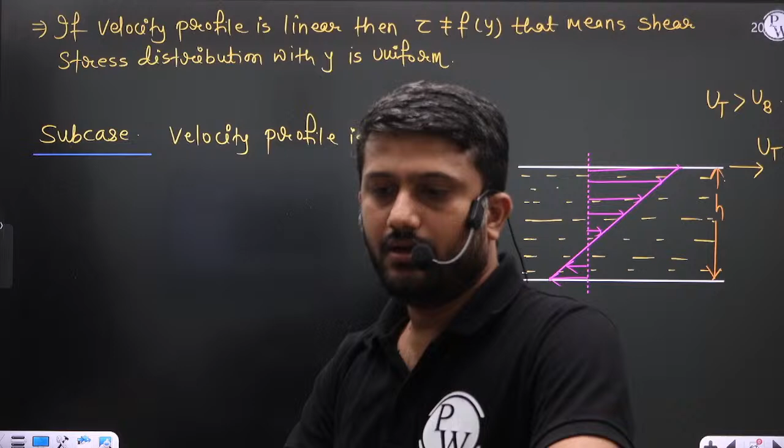The shear stress distribution is uniform. I already clearly written here, na? If velocity profile is linear, then the shear stress distribution is uniform. So what is the shear stress distribution? It is uniform only. This is the tau variation, and this is the u variation, velocity variation, and this is the tau variation.

Okay, now calculate. If you want to find out the shear stress, then use Newton's law of viscosity. This is the only tool that you have. As per Newton's law of viscosity, tau at any y is equal to mu du by dy at that y.

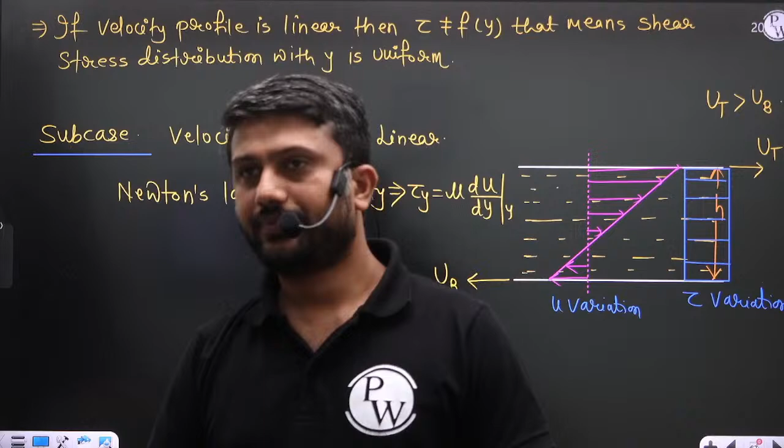Fine. Now, velocity profile is linear, na? So directly we can write that is mu multiplied by du, which is the top velocity minus bottom velocity divided by gap. No problem, velocity profile is linear, we can directly write u top minus u bottom divided by gap.

Is it fine? Now see, tau at any y is equal to mu. Now use proper sign convention, beta. Proper sign convention means the top plate is moving in the positive x direction, bottom plate is moving in the negative x direction. So minus Ub, divided by the gap, that is h. So simply we can write this is mu multiplied by Ut plus Ub divided by h. So this is the shear stress experienced by any layer.

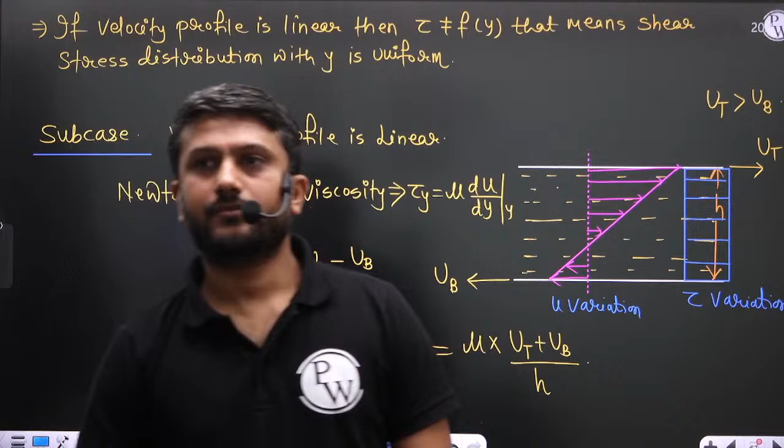Is it fine? You can easily calculate. Let us consider I am giving some values: fluid viscosity as 2 poise, top velocity as 10 meter per second, and bottom velocity as 5 meter per second.

So can you calculate the shear stress? Yes, sir, we can calculate the shear stress. Can you find out the shear stress distribution? Yes, we can find out the shear stress distribution because the velocity profile is linear, therefore shear stress distribution is uniform. Each layer experiences the same shear stress.

Is it clear? Okay, fine. Now beta, if I ask you, can you find out the distance from the bottom plate where the velocity is 0?

This is the x-axis, this is the y-axis. At y is equal to 0, u is equal to ub, or you can say u is equal to minus ub. At y is equal to h, u is equal to ut. So can you find out the distance from the bottom plate where the velocity is 0? Let us consider that is a.

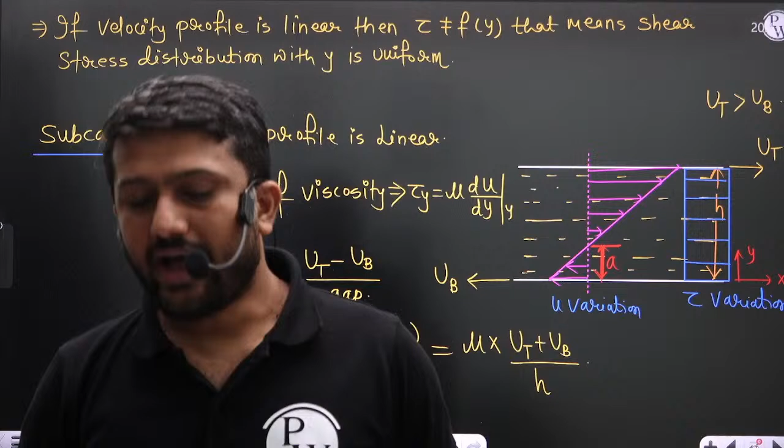So at y is equal to a, the fluid layer velocity is 0. This layer at y equal to a has zero velocity, because the velocity changes from minus 5 to plus 10. Let us consider the bottom plate velocity is 5 meter per second and the top plate velocity is 10 meter per second, so the velocity changes between minus 5 meter per second and plus 10 meter per second. So in between, as you go from minus 5 to plus 10, definitely there is some point where velocity is 0. The bottom layer has velocity minus 5 meter per second, the top plate has velocity plus 10 meter per second, so in between there is a layer having velocity 0.

So can you find out that layer having velocity 0? Yes, we can find out. Let us consider at a distance a from the bottom plate the velocity is 0. If this is a, obviously this is h minus a, and this corresponds to ut, this corresponds to ub.

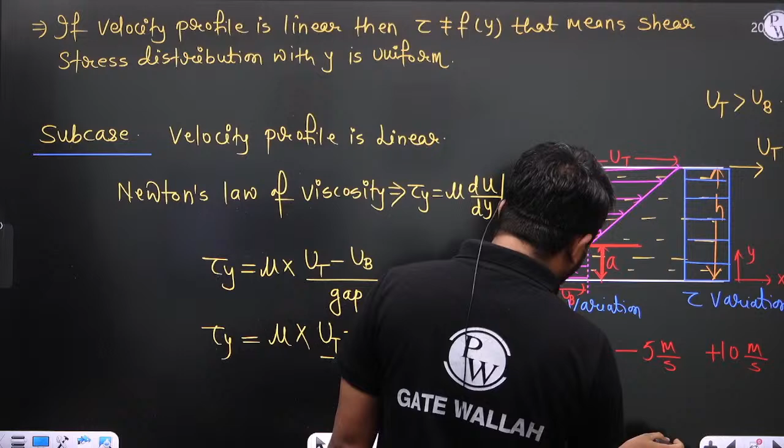So if you apply the similar triangle concept: ut upon h minus a is equal to ub upon a. So we can write h minus a divided by a is equal to ut by ub, and simply h by a minus 1 is equal to ut by ub. Now h by a is equal to 1 plus ut by ub, or a is equal to h upon 1 plus ut by ub.

So this is the value of a. So you can easily calculate the distance from the bottom plate where the velocity is 0. Is it clear?

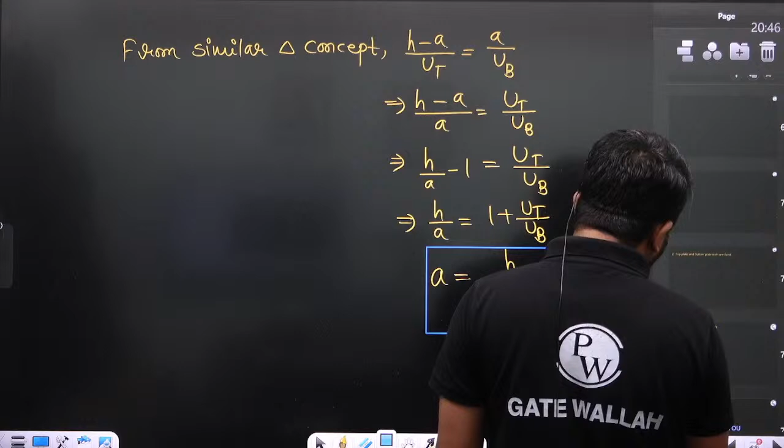Okay, I think this is sufficient for today's class. We will discuss the remaining topics related to Newton's law of viscosity in the next class. Today we covered kinematic viscosity, the effect of temperature on kinematic viscosity, and why kinematic viscosity is called momentum diffusivity. We also discussed some problems and applications of Newton's law of viscosity.

So the application of Newton's law of viscosity is not completed yet. There are a number of cases, and we will discuss those cases in the next class. So beta, I hope whatever we discussed in today's class is clear to everyone.